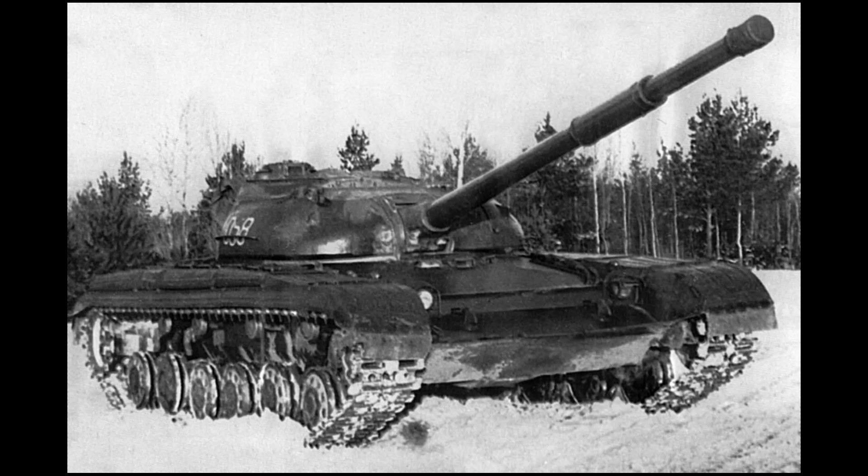And today a very interesting topic, because we will talk about the first mass-produced, although not the first in the world, tank with composite or special armor, if you prefer. We will talk about the T-64, T-64A and T-64B. It was from these machines that the T-72 and T-80 tanks later evolved.

But it was the T-64 in many aspects, and through the 1970s until the 1980s, that was the most progressive Soviet MBT. Of course, I will focus on the armor here, because the whole story is so extensive that it is more suitable for a book, and a quite thick one, than such a short presentation.

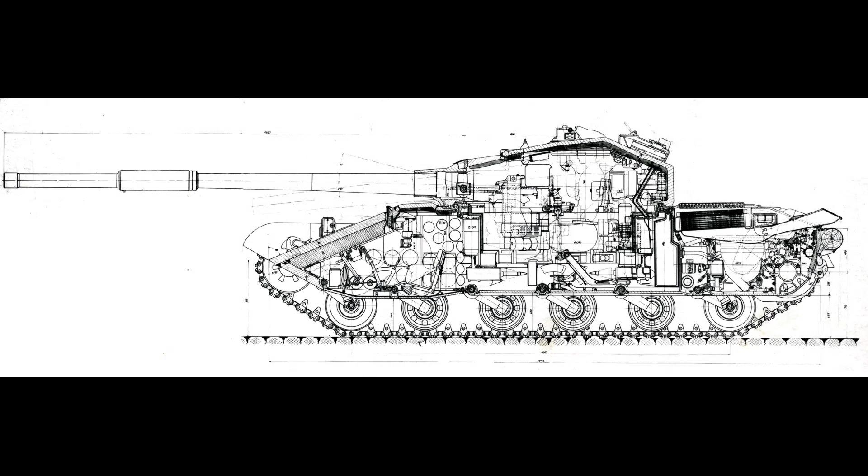We will start with the description of the hull armor, initially in the technical project from 1961. A two-layer system was proposed, consisting of a steel plate with a thickness of 80 millimeters, behind which there was a layer of glass textolite with a thickness of 140 millimeters. It soon turned out that such a system did not fully meet the requirements, and it was slightly modified. So here we can see the original T-64 project with a two-layer type of front hull armor.

In the modified project of the front armor, the glass textolite layer was reduced to 105 millimeters. It was made from two 52 millimeter plates of glass textolite, and then was followed by a 20 millimeter thick armor plate. The whole armor array is inclined at an angle of 68 degrees. This arrangement was adopted for the T-64, T-64A, T-64B, the T-72 Ural and T-80 tanks. For the turret, however, two special armor systems were proposed.

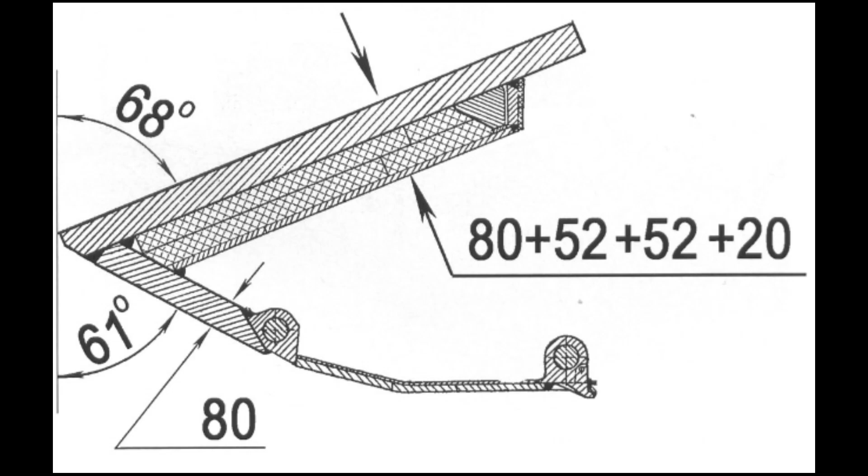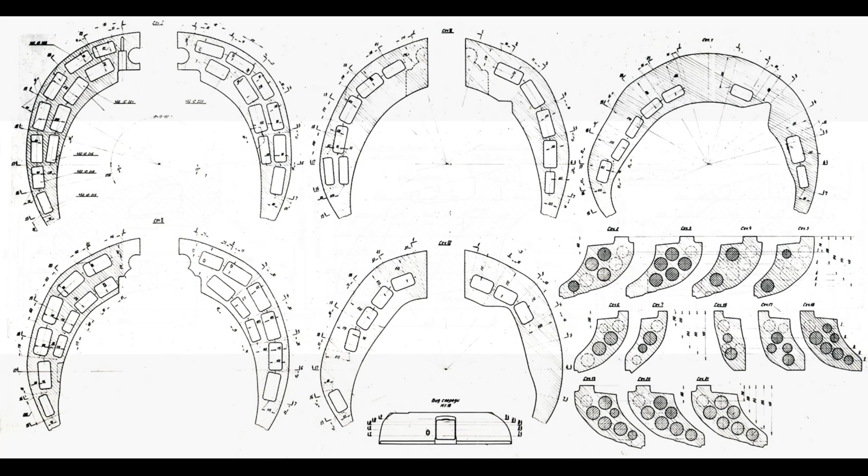The first proposed armor system variant was a cast turret shell with ceramic blocks embedded in it during the casting process. From the front, the maximum thickness of this armor was about 420 millimeters. The second variant assumed the production of a cast turret shell with chambers for the special armor layer. When the main turret shell cooled down after casting, molten armored aluminum alloy was poured into this chamber, which after solidification formed the special armor core. From the front, the turret with this type of armor had a maximum thickness of about 500 to 600 millimeters.

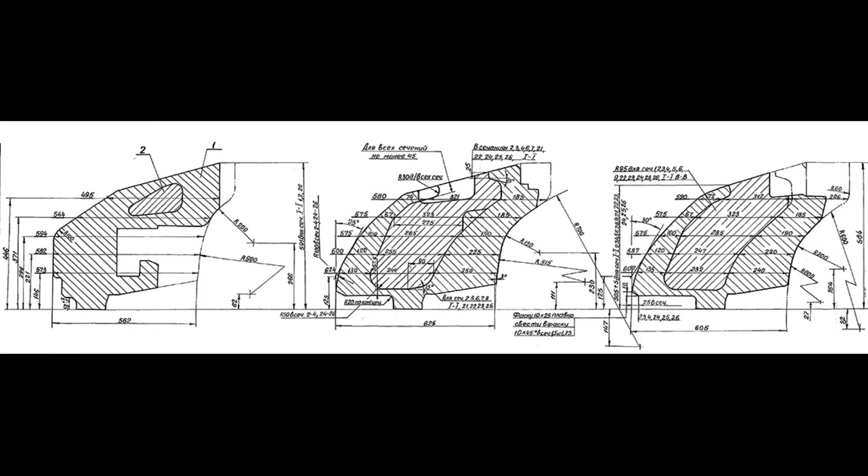During the production of the T-64 tank, this second variant was chosen, probably because it was cheaper and easier to manufacture. This turret, however, had some disadvantages. First of all, the weight of the turret increased compared to the first proposed variant. Secondly, in certain turret positions, the driver's hatch was blocked by its massive frontal armor. It was therefore not a satisfactory solution. So as you can see here, these are technical drawings for the turret armor, and here is the drawing showing how the armor interacts with shaped charge projectiles.

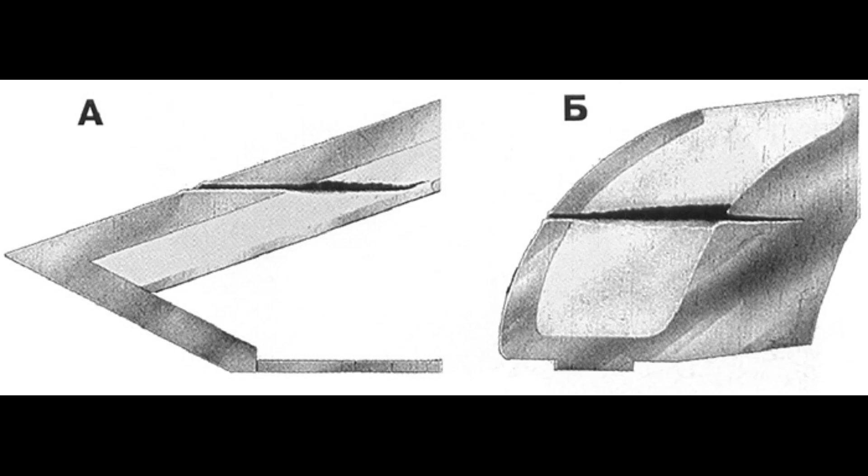Therefore, steps have been taken to solve this problem by developing the turret with new special armor. Let me quote here an excerpt from a book describing the official history of the NII Stali Institute.

And so I quote, "The task was to eliminate this drawback without increasing the distance between the axis of the rotation of the turret and the axis of the hatch opening. For this purpose, the thickness of the turret had to be reduced compared to the aluminum steel turret by almost 200 millimeters, from 600 to 410 millimeters.

The decision to change the thickness of the turret while maintaining its anti-shaped charge and ballistic resistance within the specific requirements was proposed by engineer Jerozolimski. He proposed to do so by using high-hardness steel inserts for the turret front, heat-treated by differential isothermal quenching to obtain a particularly hard core and a relatively less hard but more plastic outer surface.

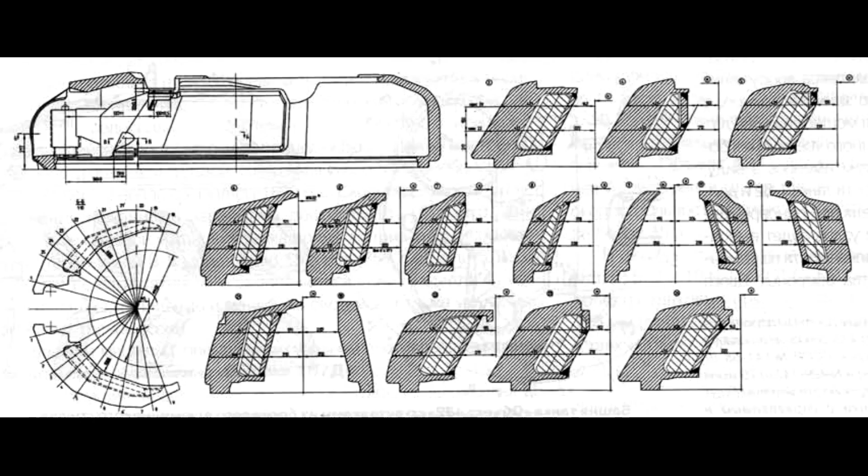Therefore, the solution turned out to be not entirely successful, and probably it was not introduced on the new machines, designated as Object 434 or T-64A, on a larger scale. Although we can assume that perhaps a small series of these tanks received such armor in the form of a trial batch.

On the basis of the decision of 12 GU MOP of military unit 52682-3 in 1966, the heavy machinery construction plant in Zhdanov was able to cast the first 50 turrets with ceramic fillers in the form of ceramic balls.

In September and November 1967, the military units G-4448 and 68054 carried out ballistic tests of the armor of 3 turrets of this new type with special armor in the form of ceramic spheres, or balls if you wish. The turrets were compared with turrets with special armor made of high hardness steel plates.

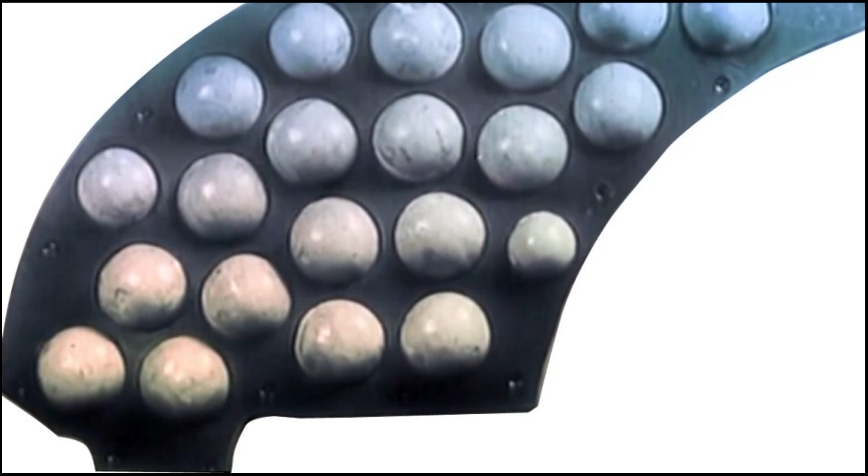So this is how the ceramic spheres were inserted into the turret casting. These spheres or balls created the armor belts, which will be mentioned later on.

A number of the above essential properties of ceramic filled turrets give us the basis to support the recommendation for further work on finalizing the design of such turrets and for the final series production testing as described earlier in letter number 7889 of December 22, 1967.

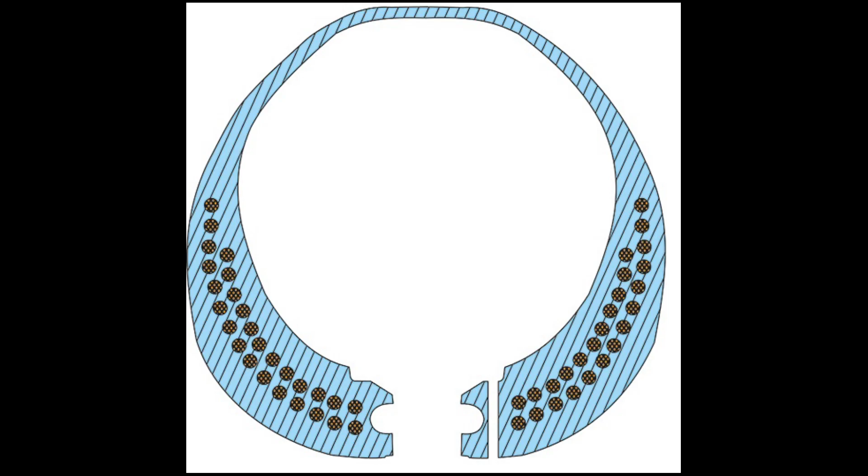It seemed that the problem of the tank's turret armor had been resolved, but it turned out that the developers of the rival turret with special armor in the form of high hardness armor plates questioned the results of the turret tests with ceramic armor. I am quoting: "As a result of research and development works carried out by the Unit A-7701 VNII Transmash in 1967, 3 experimental turrets with ceramic fillers K22, K23 and K24 were tested.

Based on the test results, the A-3530 plant in letter number 7852 SS of December 22, 1967, in 1968, proposed the production of a batch of turrets with ceramic filling for the Object 434 tank, this means 5 units, and for the tank T-64 Object 432 in 50 units number. On this application, we consider it necessary to present the following conclusions.

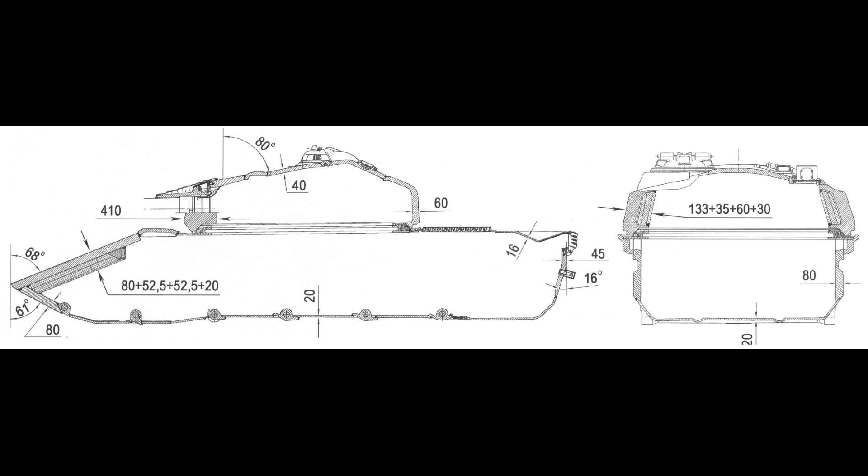However, there is information that during production there were still problems with maintaining the quality and uniform parameters of the armor protection. On the other hand, the frontal hull armor underwent changes during the production and modernization of tanks, which can be seen on this picture. So, it is interesting to note that the production series T-64BV had a different type of front hull armor. It is seen on the bottom of the drawing, compared to the T-64B tanks upgraded to the T-64BV standard. So the second drawing from the bottom is the T-64B upgraded to the T-64BV standard.

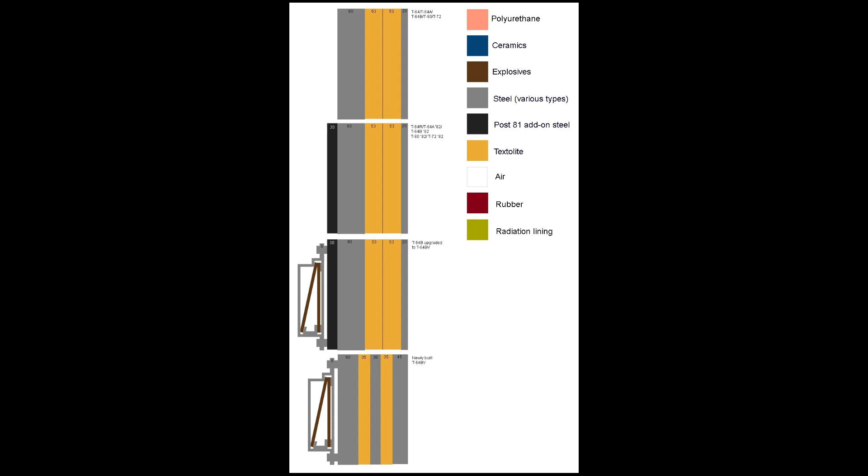In 1985, the modernization of the T-64B tanks to the T-64BV standard was started, as well as the production of the new build T-64BV tanks with a changed front hull armor layout, and the protection was also strengthened by installing the Kontakt-1 explosive reactive armor modules. Of course, the entire story is more complex, and unfortunately for English speakers or people that do not speak and read Russian, the best sources are obviously in Russian or Ukrainian. But I hope that this video kinda explained the evolution of the T-64 armor protection and the problems connected to the development of the armor for this type of tank.